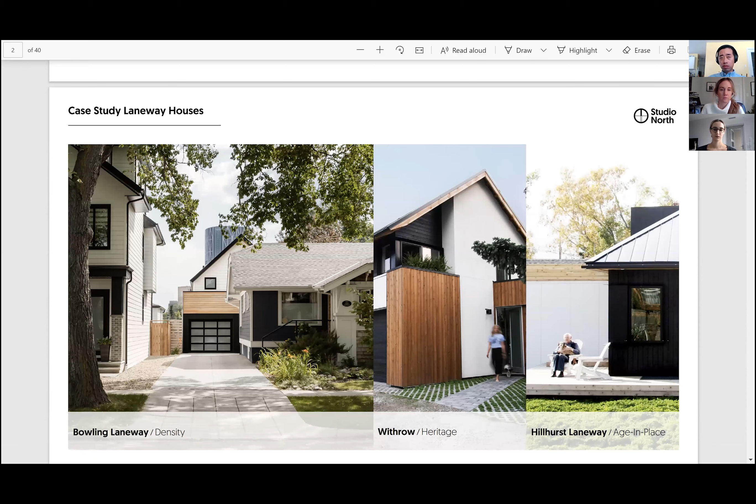In my time at Studio North, one thing they've become really well known for—I've only been here over the last year, but prior to that, with many ongoing projects, we've really specialized in laneway housing as a design method to address urban density in Calgary in a sustainable and equitable way across numerous aspects. So today I'm going to go through three case studies looking at how that works in some of our previous projects and where we'd like to take it in the future.

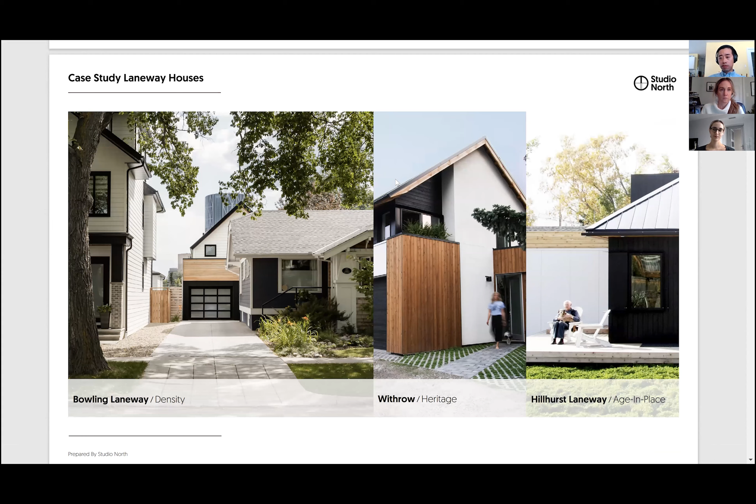So just for some quick background, I wanted to talk first about what a laneway house is, which is essentially repurposing previously unused space at the back of existing generally single-family homes as what would traditionally be known as a garage space, and turning that into living accommodation, whether that's rental accommodation, for extended family, friends, or for the tenants themselves.

So it allows people to add a little bit more flexibility to their property and adjust their style of living, as well as the urban relationship between their house, their yard, and the public realm.

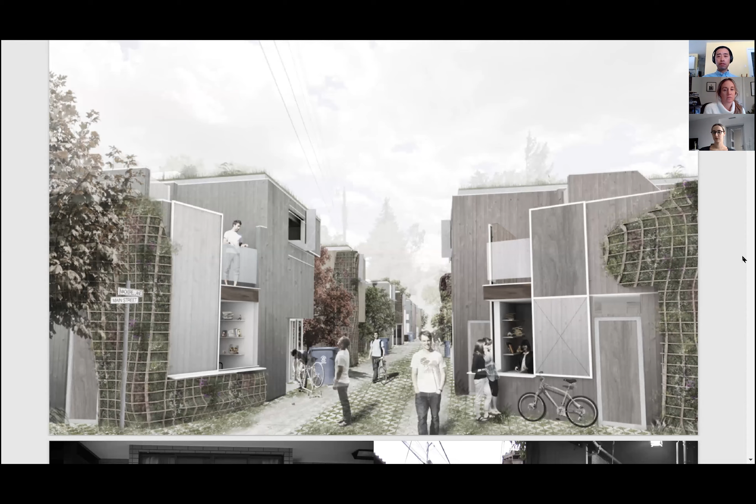So this is from one of my boss Matt Kennedy's theses on laneway housing. This idea really started for him and my other boss Mark during Matt's studies in Japan, where he noticed an interesting take on density there, with tighter spatial requirements between public and private realm, and much higher density.

This led to an interesting intermediary contested space where people would often use plants or seating areas, many things like that, to create more connection between public and private space, a kind of intermediary boundary, and how people would claim that space architecturally was really interesting to him.

As well, how the family models and business models worked in very close proximity with each other. Funny enough he doesn't know this yet, but during my time studying abroad in Japan, I had very similar conclusions from my observations of those neighborhoods and people's reclamation of private public space and the intermediary space between, architecturally, programmatically, etc.

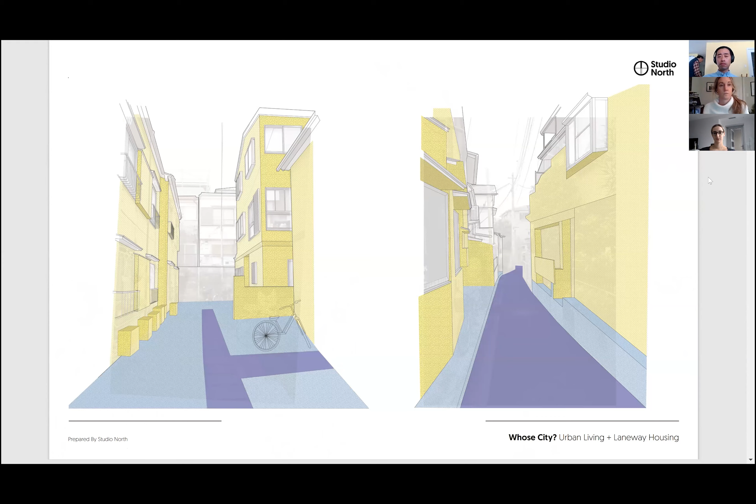Anchoring Matt's observations in Japan is Mark Erickson, who spent lots of time teaching architecture in the Gambia, located in West Africa, and was struck by these interesting familial compound typologies of architecture, in which each family has a large allotted space in which they can grow and adjust.

They adjust to the growing extended family with relatives, children, grandparents, and parents all living in the same area. He was fascinated with these relationships and how these compounds work and grew over time, and the social connections over the short and long term that they were able to create.

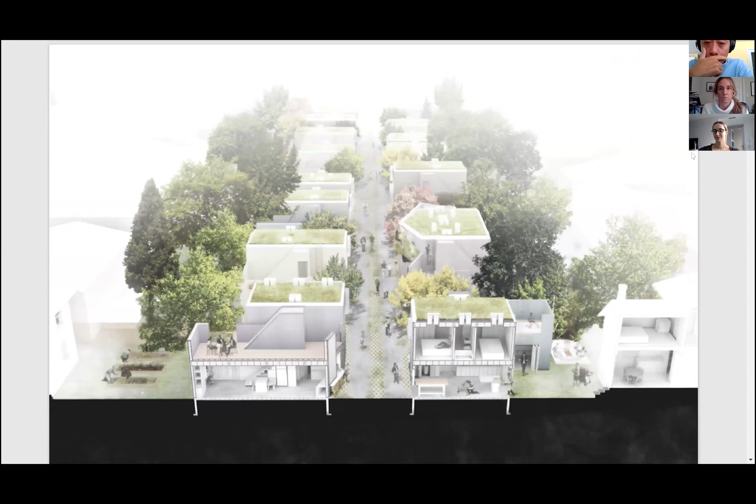This resulted in Matt's eventual thesis on laneway housing, looking at how we can sustainably increase urban density in places like Calgary that are so culturally dependent on single-family homes, while retaining the character of those homes, but also increasing density to allow for more affordable housing, more versatility, and more community, rather than strictly divided public-private property lines.

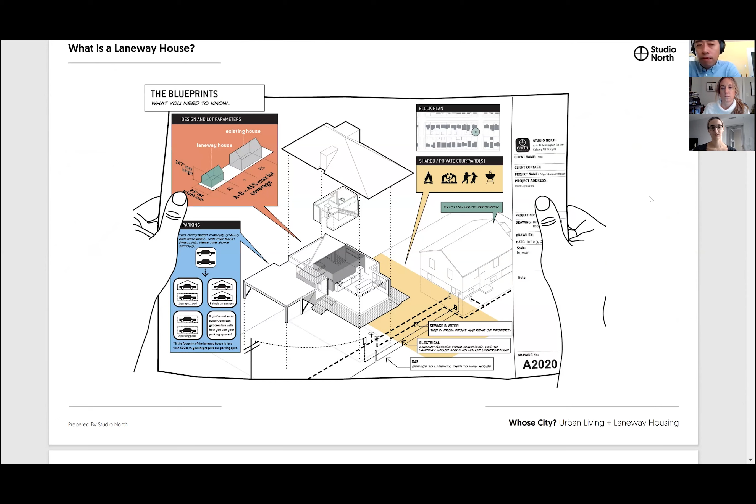So the first case study, one of the early projects they embarked on, was the Bowling Laneway, located up by Crescent Heights. This project takes an interesting approach to defining new relationships, first and foremost between the street and the public realm, as well as between it and the original house.

Since this house was built, the houses on both sides that used to be single-family homes have actually been developed and turned into duplexes. So this is really a symptomatic look at what the typical model for density in these neighborhoods becomes as the city expands, versus what it could be with this new model of laneway housing.

And as I mentioned, the most interesting part of this project is the new relationships with the public.

There was lots of discussion in the approval process of this project regarding the overlook over the lawn bowling area right next to it, and it ended up being very positive—the project allowed lawn bowlers to actually have an audience from the upstairs balcony at the back.

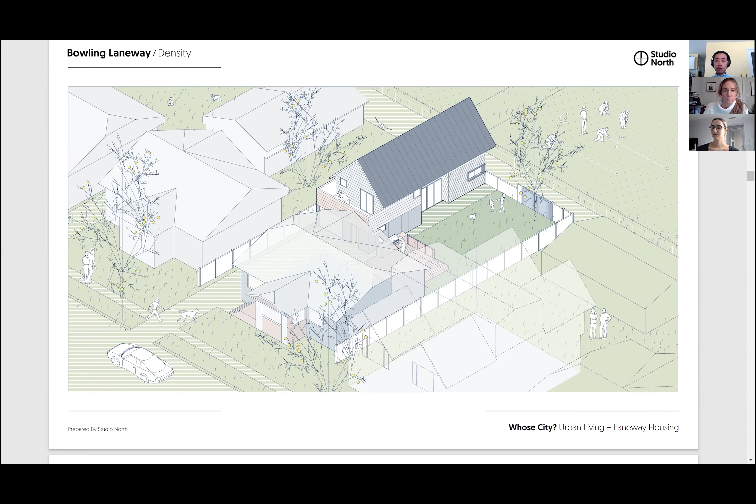The facade material is also used to informally delineate parts of the backyard—areas more for laneway house users at the back, and the original home's backyard and back deck—creating a new relationship that's not just private versus public property, but a potential gradient depending on who's occupying the space.

A second big question that came up, particularly in City Council's discussion of approving these projects, is preserving heritage and the character of existing neighborhoods.

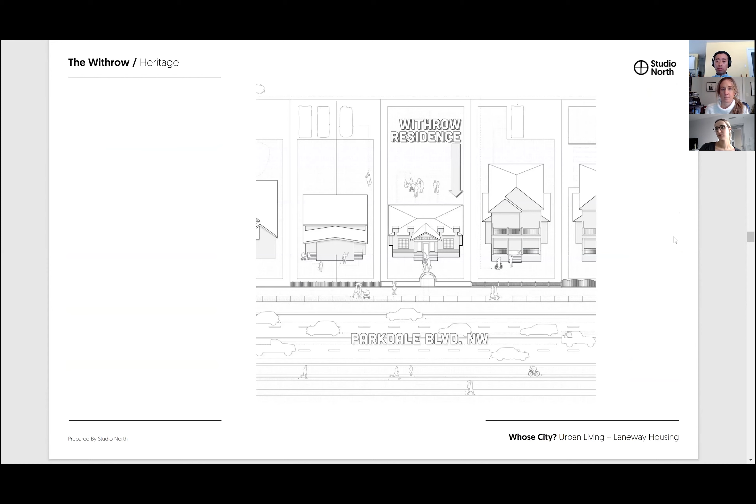The Withrow is a heritage house located in Parkdale, historically recognized by Calgary as one of our heritage assets. One of Studio North's very first projects was restoring this house into a valuable property for people in the inner city, rather than demolishing it and replacing it.

Another interesting theme carrying through from the last lawn bowling laneway project is repurposing and reprogramming the backyard to be almost a shared intermediary space, while the front yard remains clearly owned by the owners of the original house.

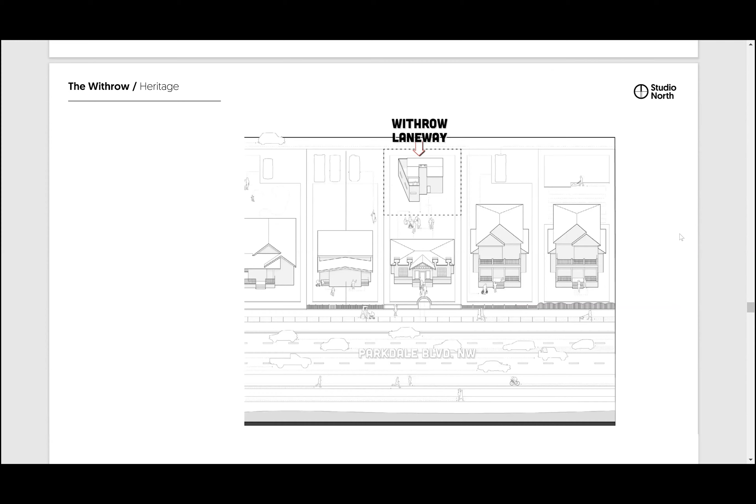This reimagines the urban configuration for family housing, turning it from single to multi-family. You can see the laneway behind it—a really exciting project for Studio North that continues to be so, because it was a model for laneway housing in Calgary and a prototype that allowed them to rent it out for family members when visiting.

It's gone through changes—Matt Kennedy used to live in the house and have people visit here all the time. We have a little shop and garage in here where we store materials and sometimes cut things on a CNC.

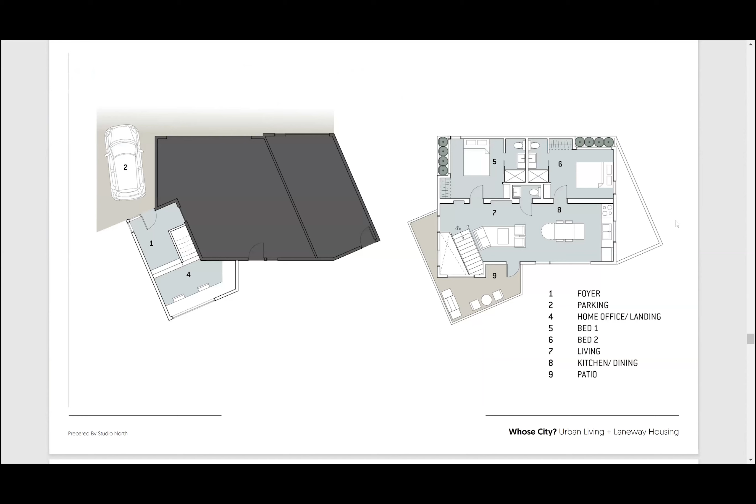Lastly, one big theme that comes up is aging in place and new familial relationship possibilities, with these laneway houses being part of an existing single family property.

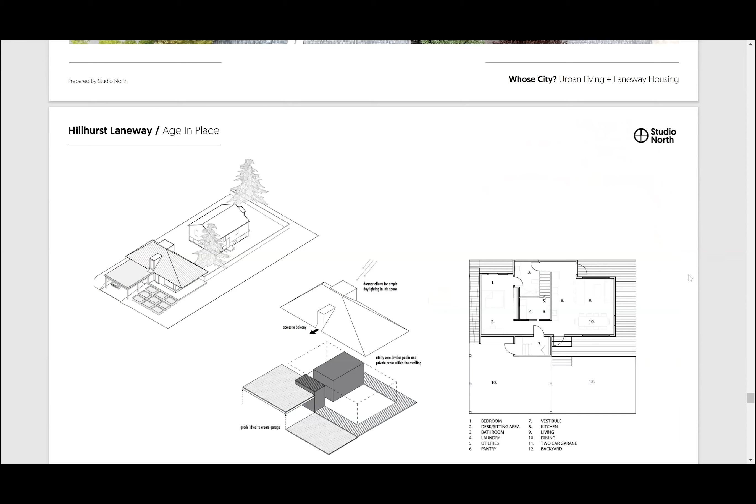A big urban problem we believe in addressing is the integration of all audiences within a social community in Calgary, both in inner city and suburban neighborhoods. This model has the potential to be more inclusive for elderly residents, who are typically relegated to seniors communities further out, allowing for less mobility, fewer family visits, and creating more social and health problems shown to be caused by isolation from their communities and families.

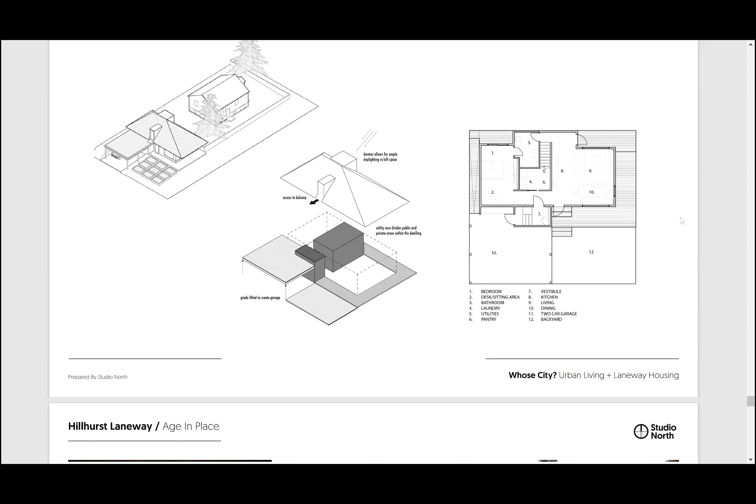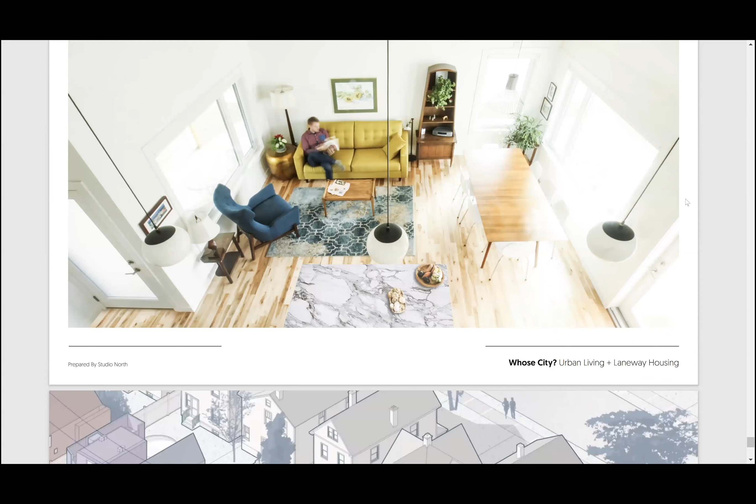Having this model for aging in place, rather than the traditional senior home model, and the lower density model, better allows them to be closer to their families, in a place where they can live right in the backyard and still retain a level of independence from their family, but also have the semi-living caretaker element they require in order to live out the rest of their lives, as well as being close to family, with the symbiotic relationship of them potentially helping out with childcare for growing young families in the city. There was a project we did last summer in Edmonton for a multifamily housing contest, and that was a big part of that model: incorporating seniors living and a much broader variety of demographics than would usually exist within an inner city community.

And that's laneway housing for you guys, and how it relates to urban equity. Thank you very much.

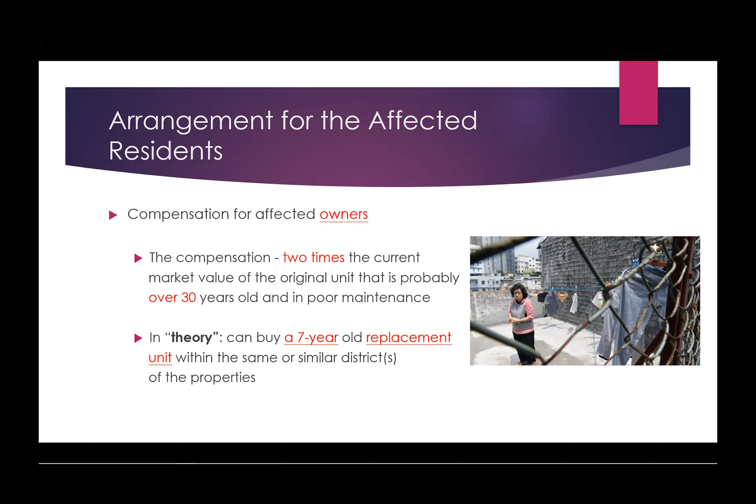Tenants are more powerless in the process. They have no say in the urban renewal most of the time. They will be removed to public rental housing or provided with cash allowance.

Honestly, the URA would conduct some public participation events, including advisory committees, district councils, public meetings, surveys, or roadshows. But all these have minimal impact on the original plan.

In my study, I found some cases with 99% opposition to the projects, but only 1% support. It still has no impact on the original plan, and we find no important amendment or cancellation to any projects.

From this model, we can see the extremely imbalanced power of different stakeholders in the urban renewal process. The government, I mean the URA, plays an important and powerful role in the process as initiator, planner, and implementer. The government is not only a regulator, but also a player, the one who initiated the whole project.

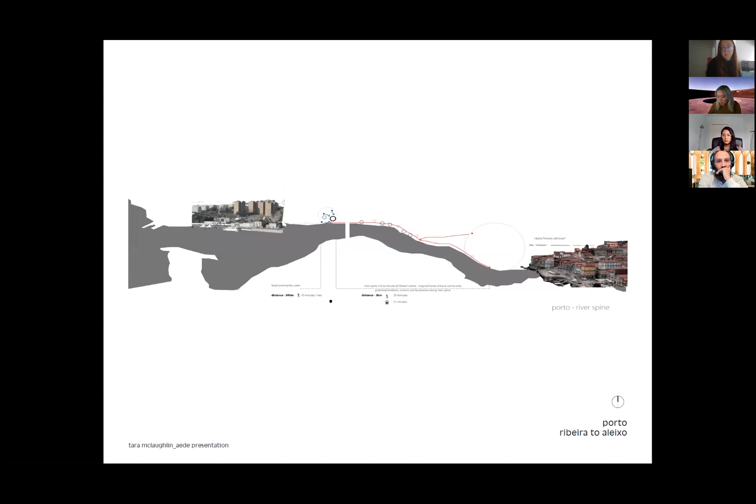While I was in my time in Porto, I spent a lot of time walking along the river spine, experiencing the waterfront and understanding the relationship between the old Porto and the newer, more industrialized and abandoned site. The distance between the old town and the new town was approximately 25 minutes to walk or 15 minutes by streetcar. I also looked at the ancient city and the development of the historical old town through to closer towards the ocean along the river spine, and you can see the site that I chose is located here in red.

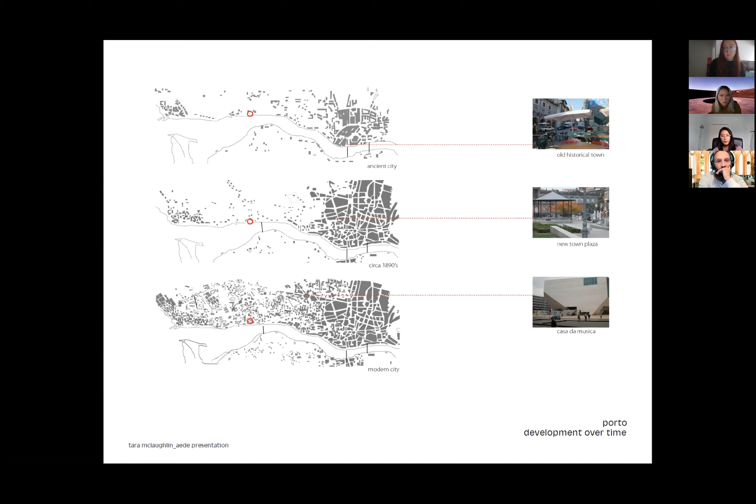Another aspect of my exploration involved the development along the waterfront. In the more historical areas, the development was quite dense and quite steep towards the waterfront, and as you moved out towards the ocean, towards the west, you notice that the way the development is constructed becomes a lot more

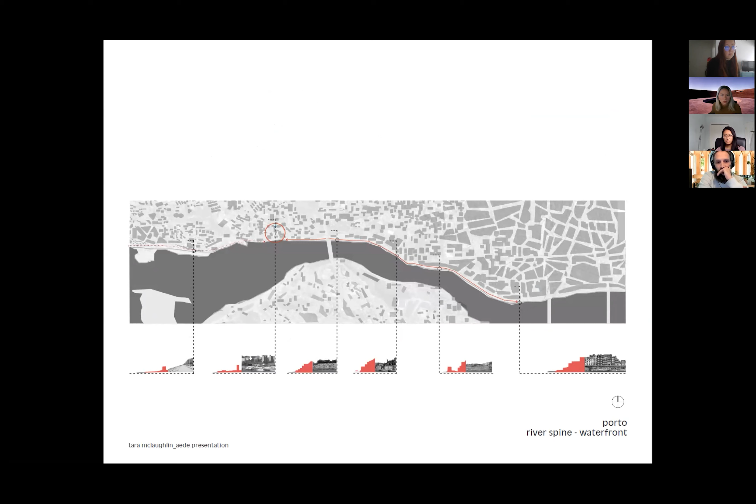gradual and less dense. A lot of the inspiration I found in photography while walking along the waterfront was in the old town. There was a lot of influence of river culture with boats and transportation by the river. There was a lot of construction as well, as boat building was a major role in Portuguese culture. Things like glasswork, intricate design and detailing of buildings, and typical balconies with fabrics hanging and textiles. There's also a lot of ceramic work, pottery, and other crafts. The interesting thing about Portugal is that art and architecture are very much one and the same, so there's not a lot of high art, sculptural and painting work, but you'll see actually a lot more of that within the architecture itself.

Walking along the riverfront, I also investigated and discovered a lot of the cultural and community centers that were playing a role in the culture of the city. I noticed that as you neared towards the site that I chose, they were few and far between.

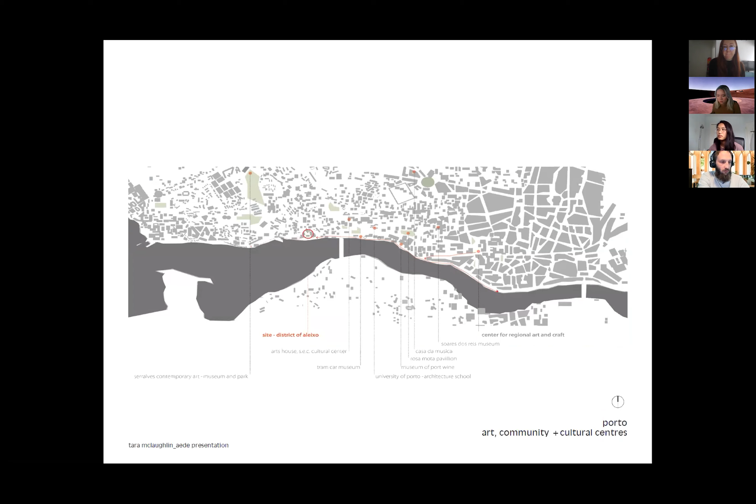Another big aspect that tied my site back to the Heritage District was the discovery of several sites that were also derelict between the site I'd chosen in the district of Aleixo and the Ribeira town. These offered possible potential infill and potential for development or new projects that could be tied to the site I was looking at.

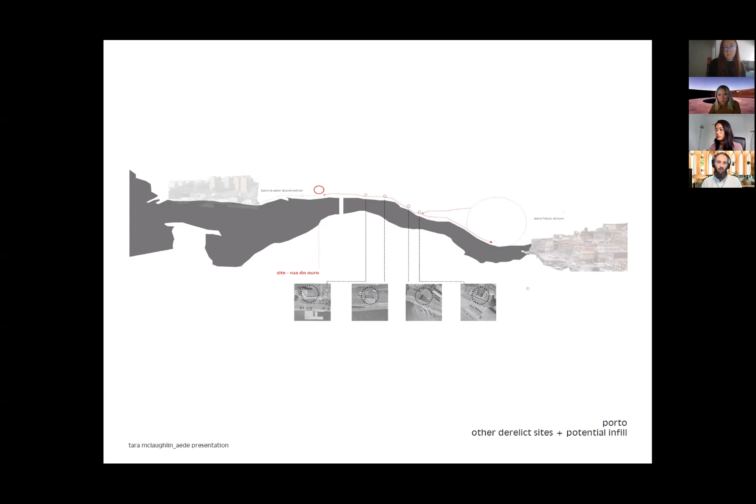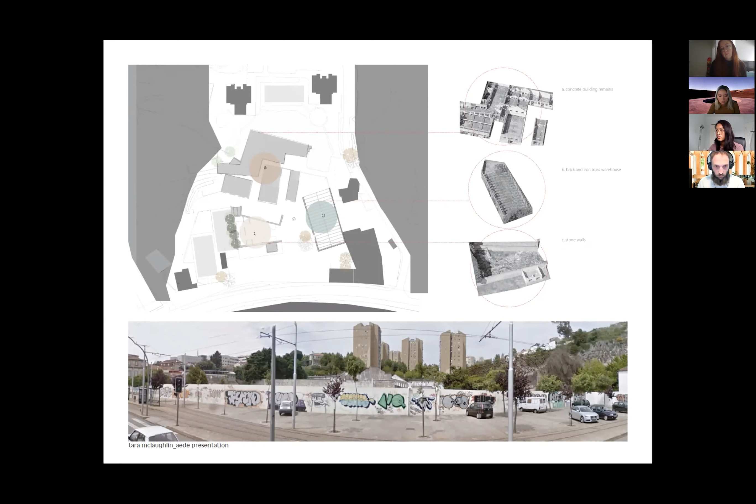This site here was completely abandoned. There were several concrete buildings that had fallen into decay. There was also a brick and iron truss warehouse that had the roof completely removed, and some stone walls that were sort of remaining but in decay as well. So essentially the site had fallen to ruin. This is giving you a sense of the materiality that was on the site when I was doing my investigation. Unfortunately, I wasn't able to get into the site to do a lot of work, but I was able to make some observations.

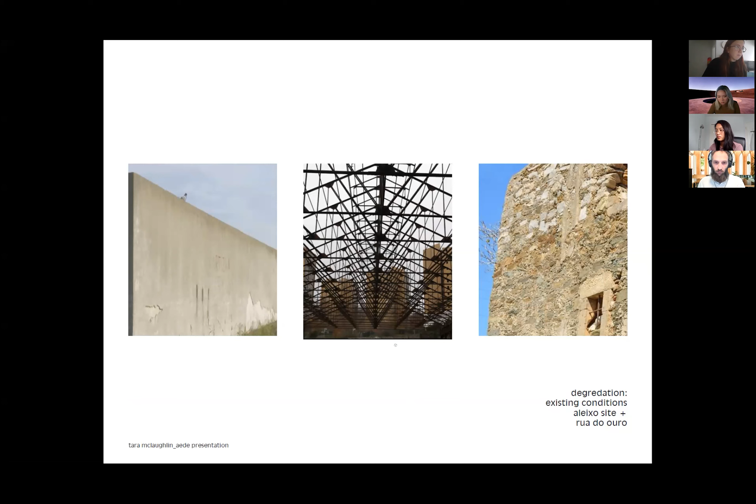Looking at the site itself, I did a lot of research and analysis on the evolution of the site over time. The site was essentially an area for industrial development, as well as boat building, and bathing along the riverfront was also a big part of the site.

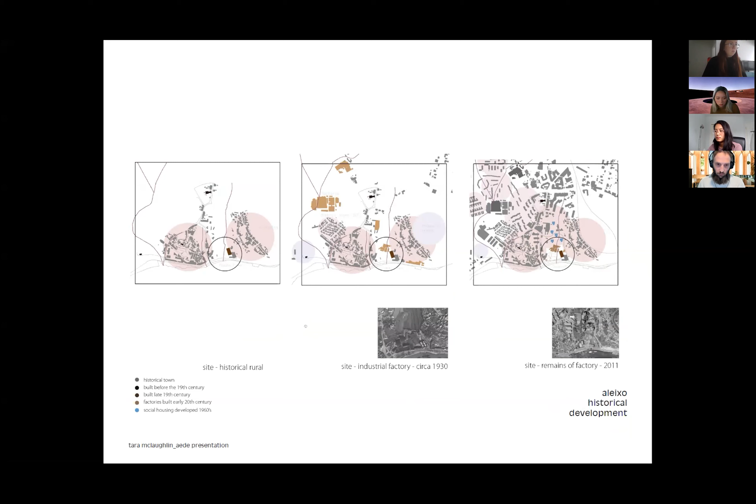In order to identify a way to approach something like this and to consider a way to improve the site, which would also help improve the community beyond, I looked at the way the industrial factories would have operated on the site and considered that as an approach to operating a program on the site in the same way. So the ideas of manufacturing, shipping, and storing were translated into areas for making, showing, and selling. This essentially looked at a comparison between the program of the site for industry and then the potential for its use as a cultural center, a place where the community living beyond in the housing complex could come and feel reconnected with the site and with the waterfront.

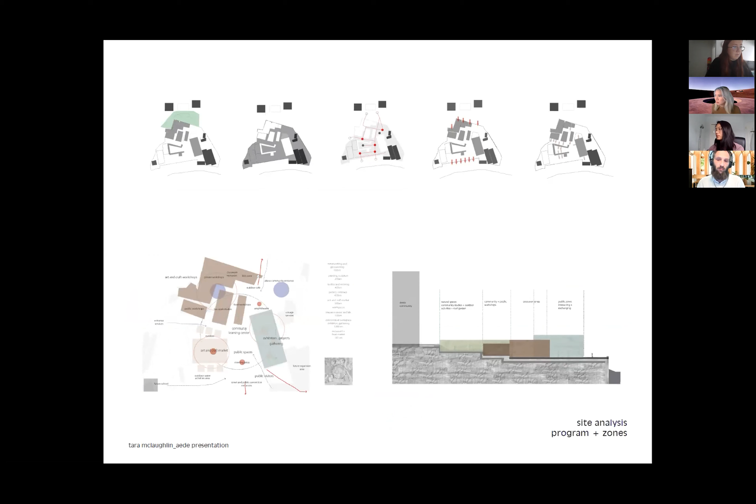I looked at several different master plan and urban context relationships and developed a zoned diagram that helped to identify places that I could intervene onto the site.

Through the program of learning, I developed an approach that would help generate economic stability for the site and for the people who would use it, primarily those living in the housing complex to the north, as well as visitors. Outcomes included skill development and the ability to sell products and engage with tourists and the local community.

User profiles examined people living in the community who would benefit most from a community learning center focused on art, architecture, and craft. Older males would benefit from several aspects, as would youth, the elderly, and children.

A holistic approach to the community learning center would allow various user groups to enjoy different aspects of the center and engage in different programs. For example, youth could work in wood shops, learning skills that would help realign them with the boat building history of their culture.

Older males, in particular, working with glass, could help reconnect with the stained glass culture, as it is a very difficult and skilled craft to learn.

The elderly would be comfortable working in textiles and weaving, as it is not too difficult on the hands when dealing with stress and age, allowing a return to the ideas of weaving and connecting. Children can easily work with pottery, gaining enjoyment and skills working with clay and helping create tiles and other objects.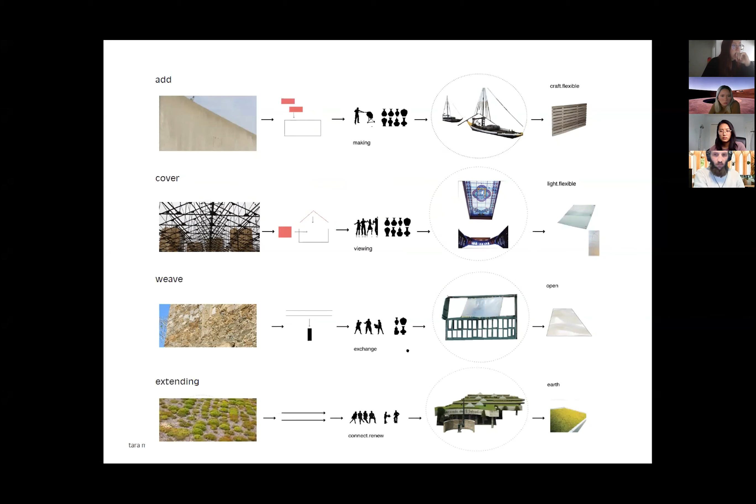Weaving with textiles could allow anchoring to the stone, creating a dynamic juxtaposition between the two. Extending out the ground condition could help create a green roof and extend the distance between the houses and the site.

Ultimately, a master plan was developed for the site that offered reconnection with the waterfront beyond and with the housing complex to the north, opening up the site and regaining connection to the city.

Workshops were organized into the back of the site with a focus on the community, including a learning center area in the form of a vocational training center.

A market area was located further south on the site to provide interaction between community users, visitors, and guests for selling products. An exhibition space would allow areas to exhibit work and also hold community meetings.

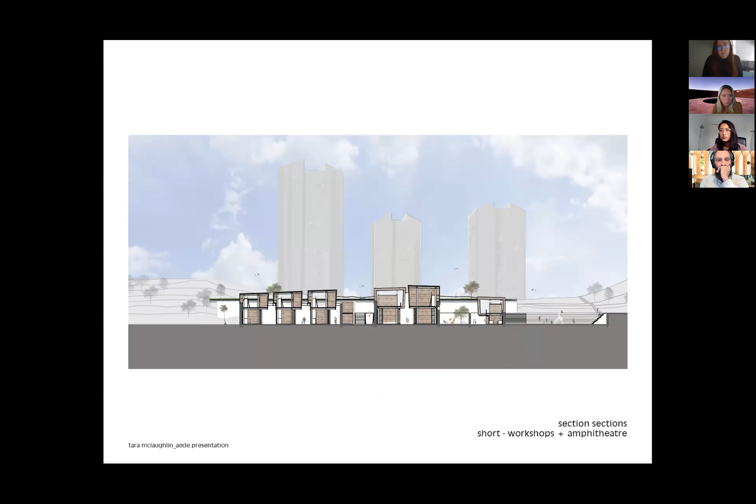Here are some sections that help identify the approach to the project. We see the towers in the back with the workshops, and you'll notice references to the boat building tradition.

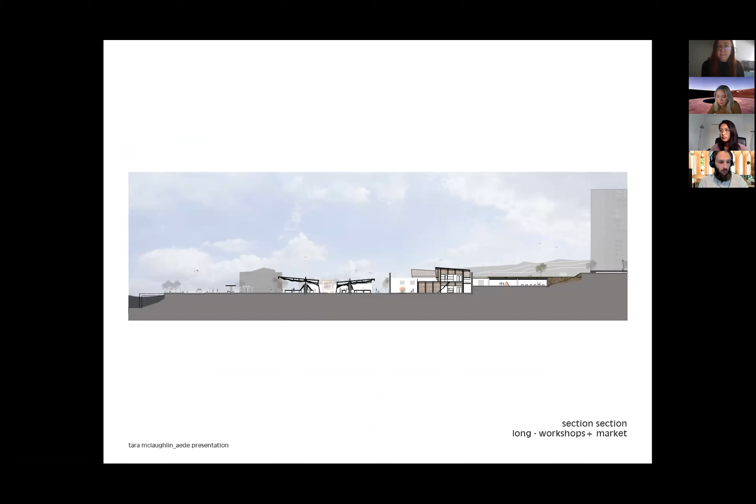The wall has been removed, with some markings indicating where it formerly stood, and ground conditions opening up the space.

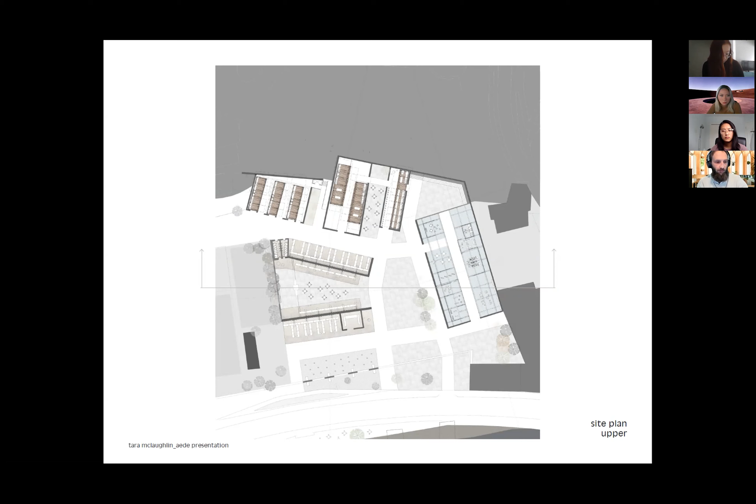The idea would be that people working in the center could essentially design and help build it, funded partially through the government as well as nonprofit agencies. Ultimately, the site would generate its own income and eventually be built up even further.

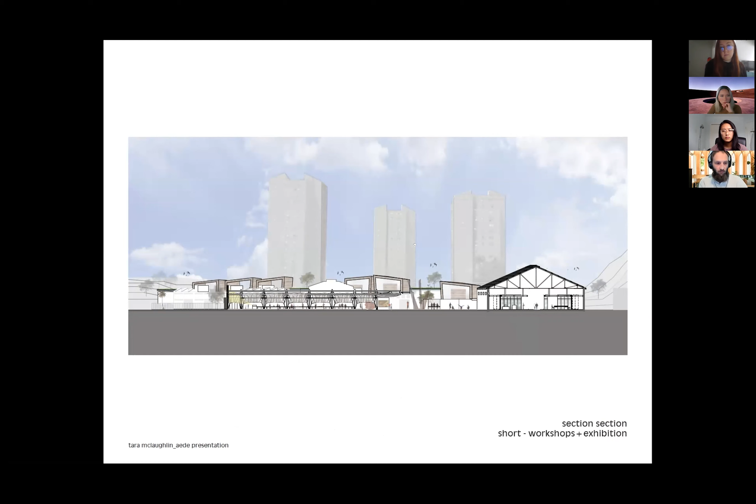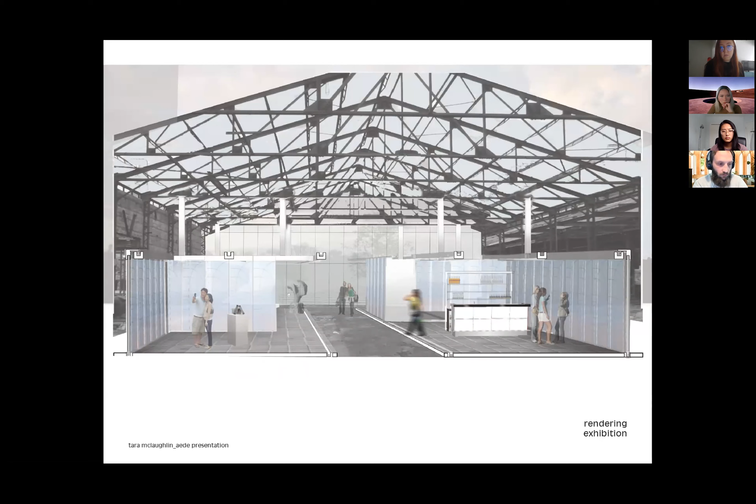Here's a few zoomed in images, and a rendering showing a closer idea of the approach to the workshops, with a nod back to boat building. A plan of the exhibition areas with sliding glass walls—you can see in the rendering the idea of opening up the space. A glass roof was also investigated, and I constructed a one-to-one detail looking at how this could bring light into the space.

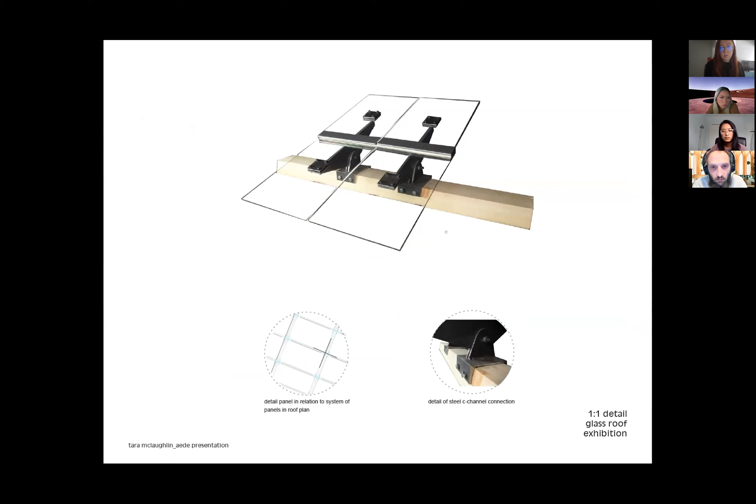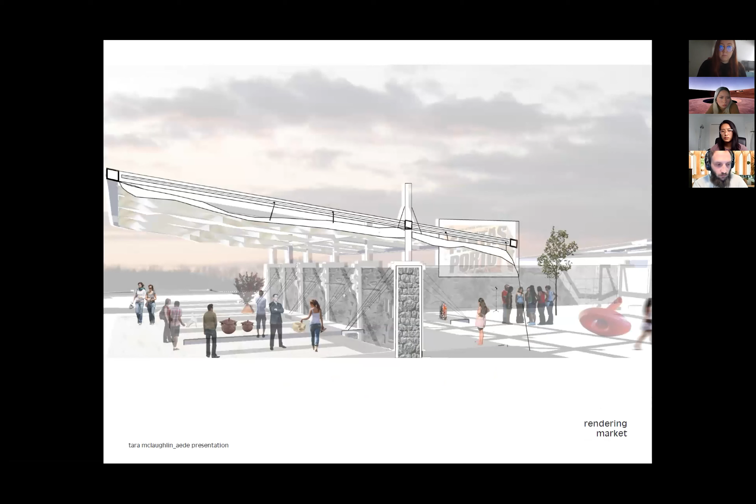The market area was the third area of focus, allowing a nice courtyard typology to develop and bring life and excitement back into the space. The renderings were created with an unfinished look, giving the sense that the site wasn't to be completed but would be built over time through participation by the users themselves.

The key concept and catalyst of this project was tying back to the Riviera. There were derelict sites located along the river spine, with potential to become smaller art projects and infill projects for other centers—opportunities used and developed by the community—tying the site back to the Riviera and improving the condition of these smaller sites beyond the larger site. That's essentially the thesis work.

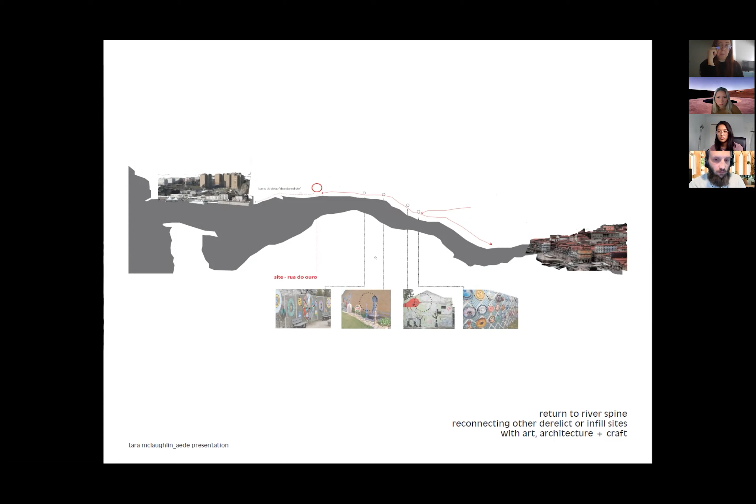I'll move next into my professional work. Before I actually started working, I traveled to the Gambia myself to work for the University of Gambia Banjul with the BCBD program.

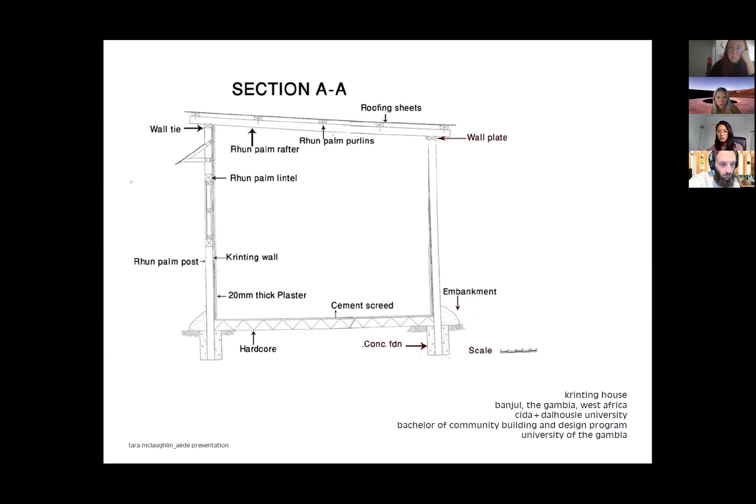I'll show an image here—this is the class that we worked with. I was lucky enough to work with the students and professors to understand how they build things and help them improve the way they build, understanding their community as well. I felt that was a nice opportunity, especially because I spent so much time in my thesis talking about community development.

I'm going to talk about four projects briefly that I've been involved in. These don't necessarily highlight gentrification or the programs I spoke about in my thesis, however I feel they really help reconnect these spaces with the city and provide improved public areas for users and the community.

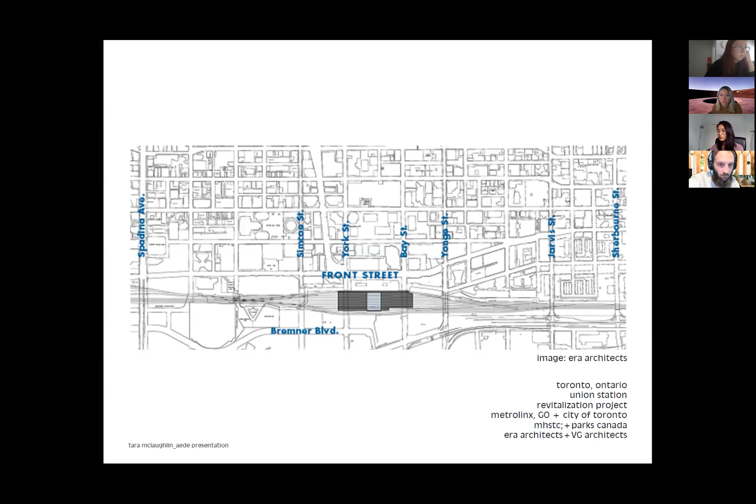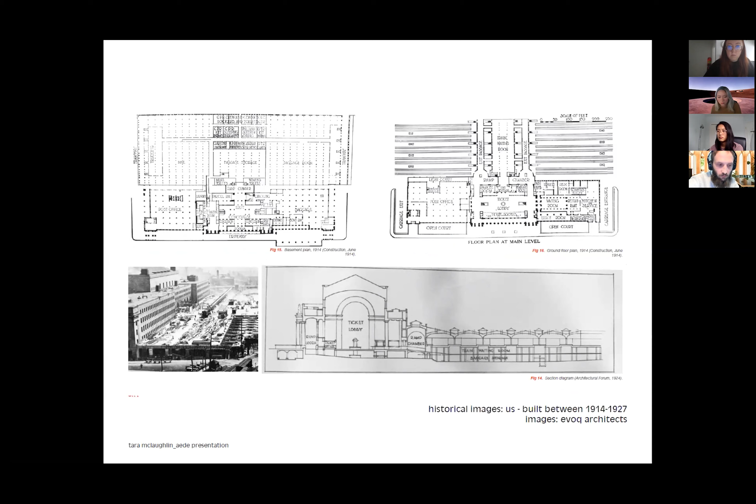The first project is Union Station in Toronto, Ontario. Union Station has undergone a revitalization project for the last several years. The main head house, which you see in this image, and the train shed, were constructed between 1914 and 1927. However, they've undergone a large restoration and rehabilitation project that's currently underway.

Multiple platforms and conglomerates are involved in this project, including the City of Toronto, Metrolinx, Via Rail, Parks Canada, and the Ministry of Heritage, Tourism, Sport and Culture. As you can see from this diagram, some aspects of the project have been completed already and some are underway.

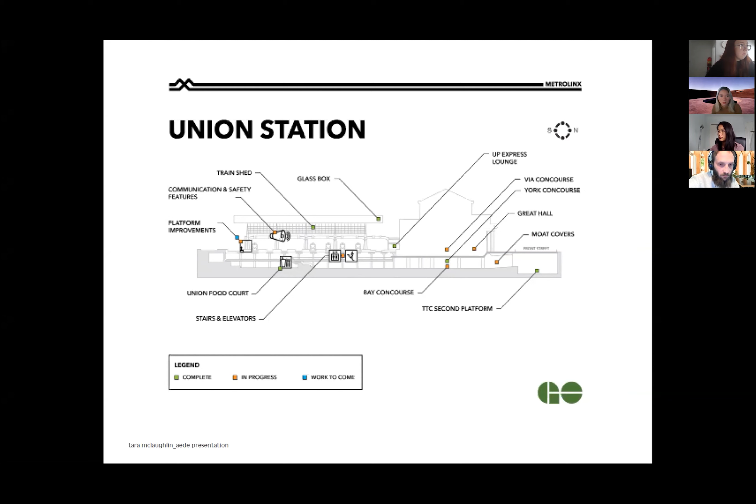There was a large glass addition added to the train shed, and the head house has also undergone a lot of restoration and renovation work on the interior.

ERA Architects was retained as part of the second phase of teams involved in the work to undergo the restoration and rehabilitation of the train shed. Our involvement as Heritage Architects was to ensure that any new work being implemented was aligned with the heritage designation of the National Historic Site, and that any detailing was compliant.

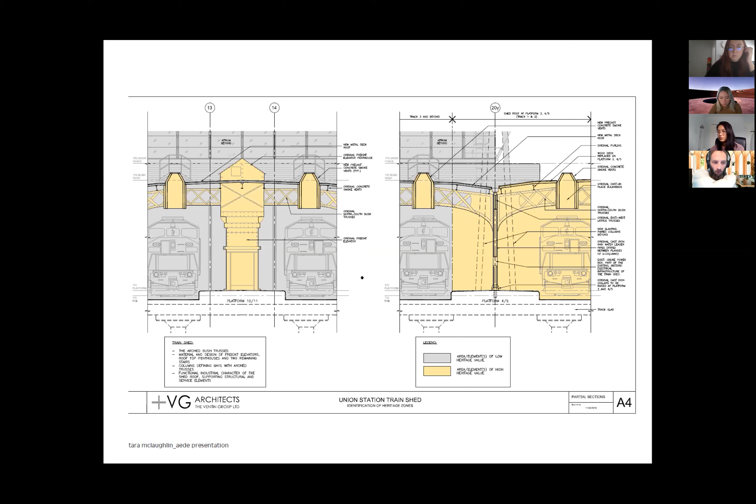The whole plan for this project was essentially to bring its users more flexibility and safety, and to open up the space, both within the train station and head house, for public users.

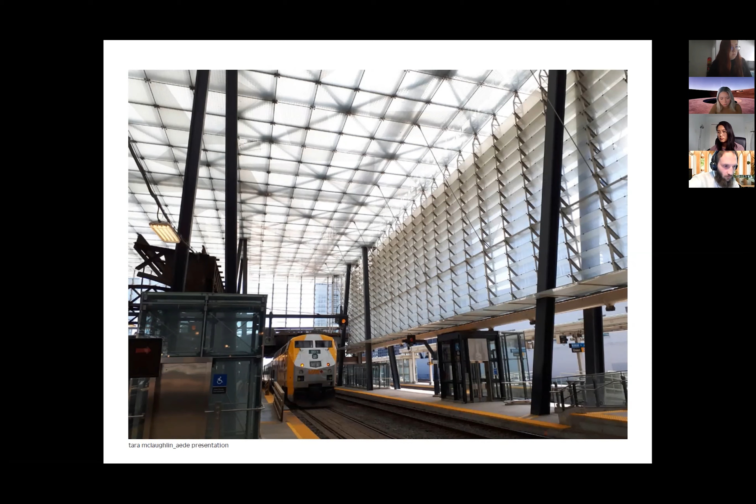The second project I'll talk about is the new Toronto Courthouse. This is a project by Renzo Piano Building Workshop working with NORR Architects, and ERA Architects were the heritage architect for the project. We were retained to complete an HIA as well as a cultural assessment to assess the impact of the proposed design on the cultural heritage of the area.

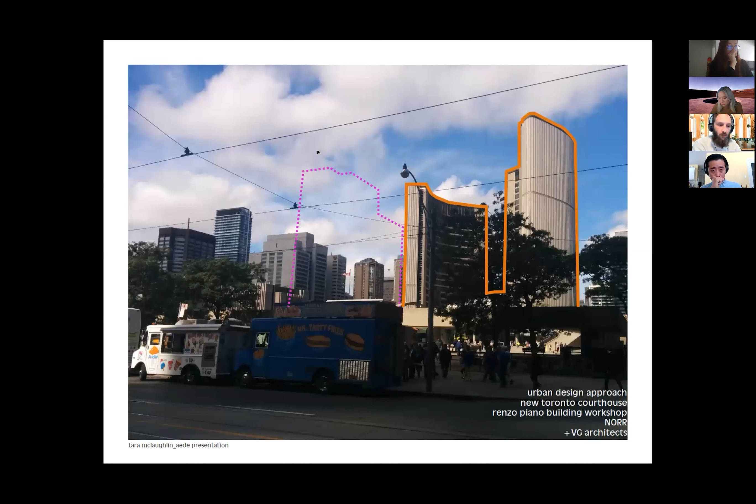We also worked with the urban design approach and the urban design panels to ensure that it worked from an urban design condition. You can see here the outline of the project. This project is incredibly important because it took an old site—you can see here it was a parking lot—so it's essentially an infill project, but it's an incredibly well-designed project that considers the outdoor and heritage fabric, as well as creates a relationship between the outdoor and indoor.

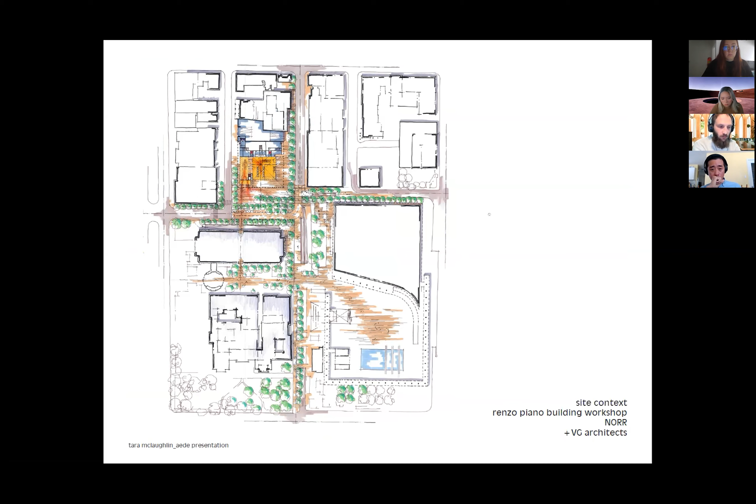This rendering by Renzo Piano Building Workshop really gives a sense of the scale, but also a relationship to the outside. This section really highlights the thoughtfulness put into creating an outdoor piazza with seats and landscape, so that it didn't just become a building for the users, it became a space for the community as well.

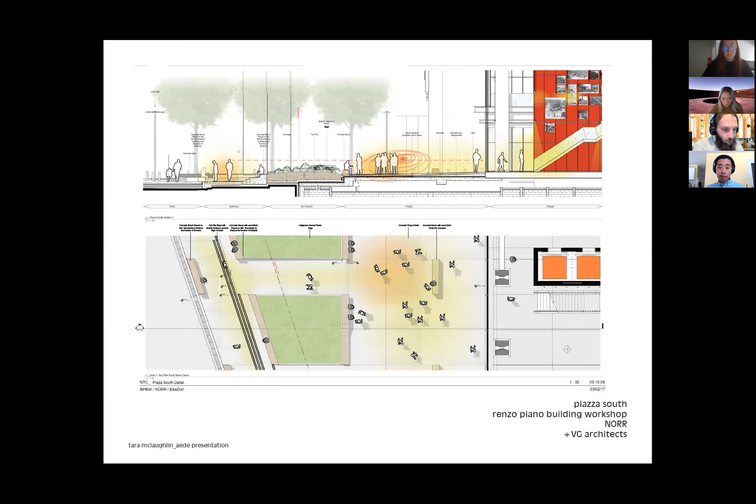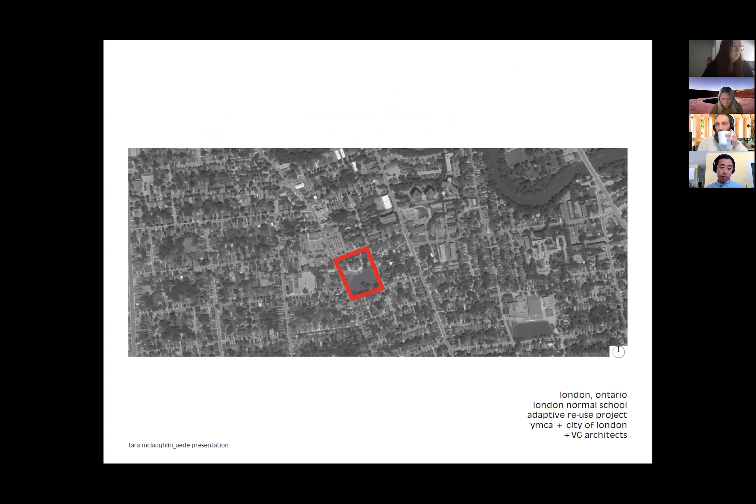Here are some conceptual sketches of the project to give you a sense of the approach. Ultimately, the YMCA wanted to bring in a childcare center, provide community spaces, as well as offices for their staff. A glass atrium addition was added onto the rear to provide accessibility so that the building could be used by all people.

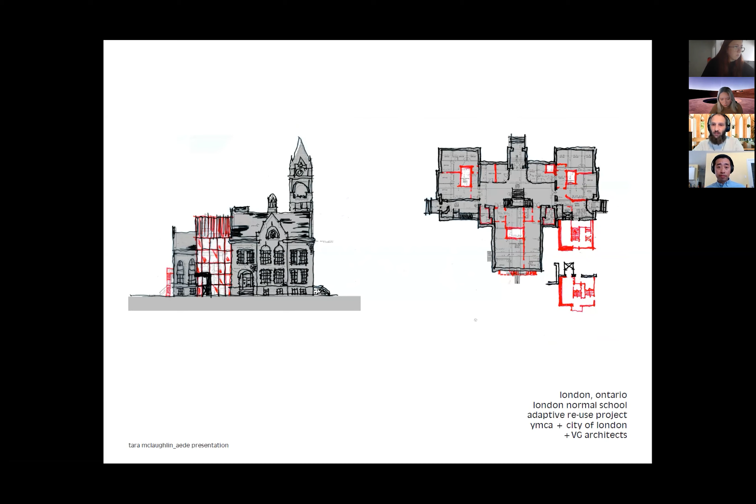Here's an image of the glass addition at the rear—this is the south of the building. Keep in mind this neighborhood had not necessarily undergone gentrification recently, but was actually a very nice neighborhood already. However, the building itself was an eyesore and was not contributing to the community.

So I think that's everything. Thank you.